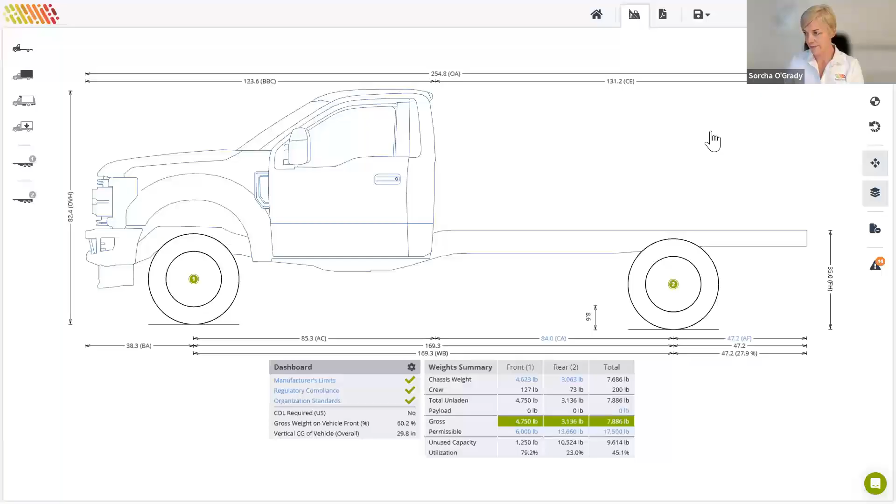Okay, so I've chosen this 84-inch CA vehicle to accommodate an 11-foot service body.

Just a quick tour of the interface before we carry on, so you know what you're looking at. There's a compliance dashboard here on the bottom left. We use that to verify compliance with manufacturer ratings, with regulation limits, and your own organization's internal standards, and we call those organization standards. You can also display your favorite measurements here, and I'll show you where to choose those later. Different users of the program have different interests or different things they want to highlight, and that's where you can do that.

There's a detailed weights table here with a detailed breakdown of weight distribution and color-coded compliance indicators. Right now they're all green, that's good. In this table, you will also be able to determine the maximum achievable payload when a body is added. So the payload is obviously 0 right now - there is no body for adding payload to.

The menus on the left-hand side, you'll use those to input information about the vehicle, body, equipment, and payload. On the right-hand side, you can switch views. For instance, you can switch from this summary view to a bridge view, center of gravity view, and back again.

Along the top, there are some - I call them completion actions. You can choose to print, save, or share your calculation. You can also choose to edit your settings up there. So that's kind of the interface in a nutshell.

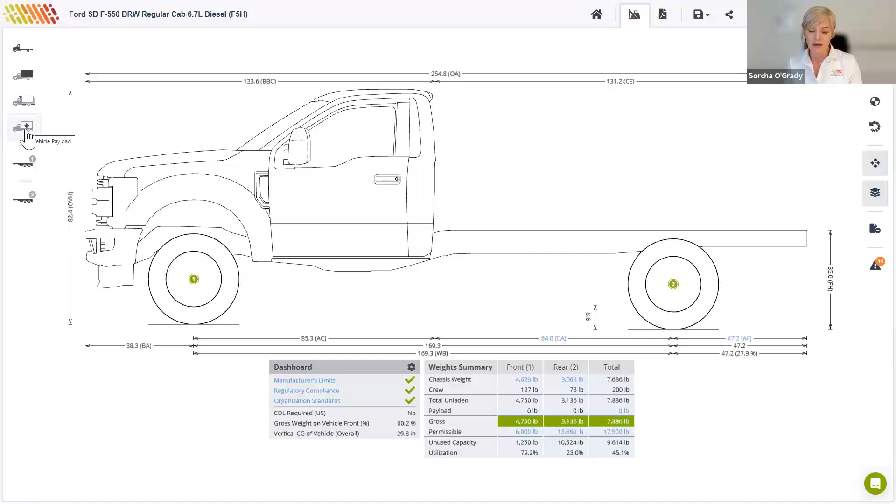So let's add a body from the second icon here on the left. I'm going to choose from the body categories - in this case, a service body. You can choose from preloaded standard bodies in our library, so you'll see a selection of bodies there. Again, you can filter these on keywords from the body descriptions.

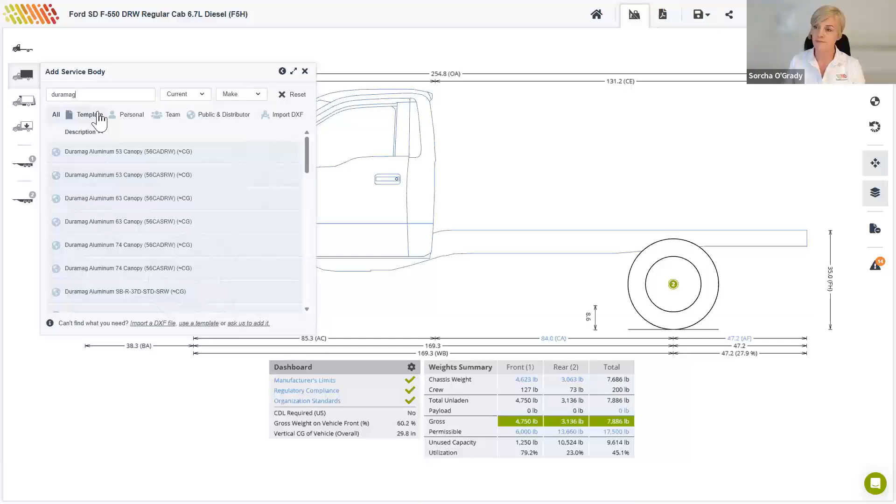In this case, I'm going to add a Duramag, and I'm going to look for one that fits an 84-inch CA. I'll choose that first one.

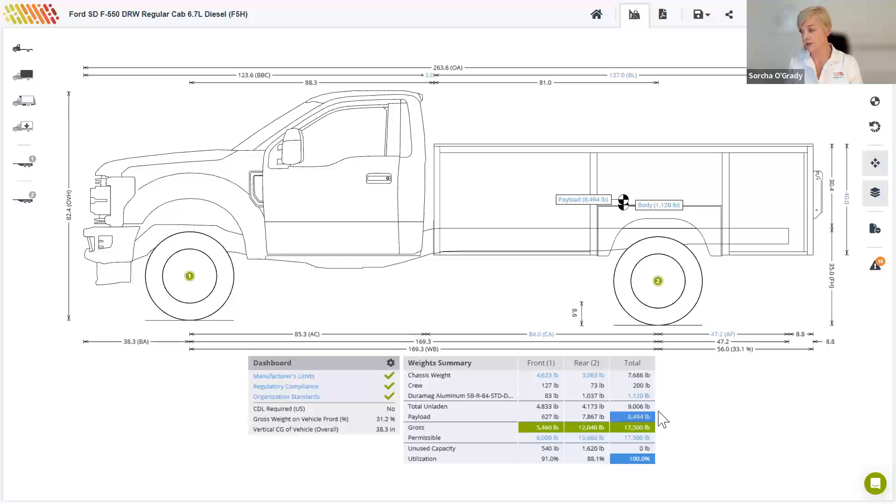So now that we've got a body on the vehicle, we can see in the weights table highlighted in blue our maximum achievable payload for this setup or this layout. And the maximum achievable payload is currently 8,494 pounds. So we click on the body again as a shortcut to open that body menu.

Since this is a standard drawing from Duramag, I can't edit the dimensions, but I can still override the weight and center of gravity values. It's worth noting that manufacturers who wish to add their products to our program can choose to make them available to all TruckScience users or only approved distributors.

We have recently added some new pages to our website here, which you can browse to see the bodies that are available in TruckScience. You'll see the Duramag that I just used here. You can browse that in your own time, but there is a new information page there on our website.

So an upfitter might choose to add a standard body, like we have done from the library, whereas a body manufacturer might like to use the tool to experiment with body design. We provide templates for this. So let's make a note of the dimensions and weight of this body, and then we can recreate it from a template body in just a moment.

You'll see the length of the body here is 137 inches, a height of 40, and the distance from the top of the chassis to the bottom of the body is 9.6 inches. We've got the width and depth of the compartments, and then a weight of 1,120 pounds.

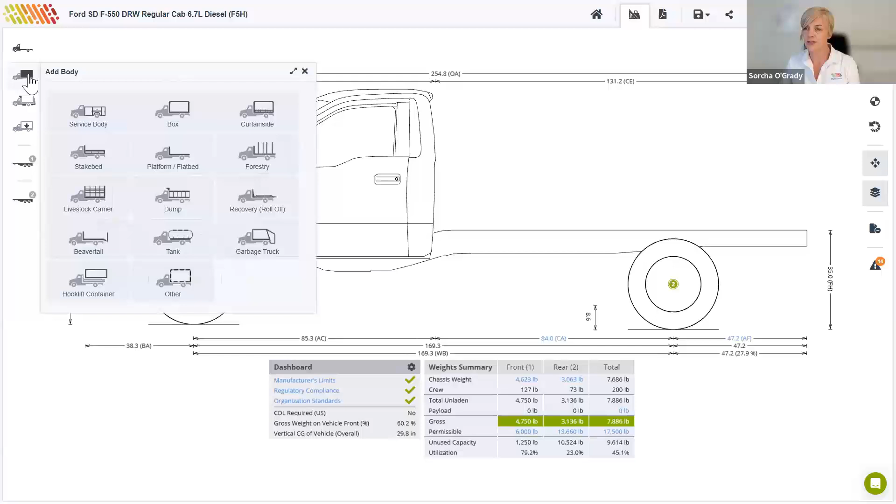So I'm just going to use the scissors to remove this standard body, and I'll add a body again from the left-hand side here. Again, I want to choose a service body, but this time I'm going to choose a template.

As you can see, templates have more generic drawings, but they do offer greater flexibility in terms of what I can edit. So if I click on the body again, they come with sensible default values for dimensions and weights, but I can edit them also.

So we'll just edit this one now to match the Duramag body we just had on. I'm going to update these dimensions as per what we just saw. This was 9.6, and we had a weight of 1,120. I think everything else is as is.

You can see that the payload is back to 8,494, which matches the payload we had when I had this standard Duramag drawing on there. You can experiment with body dimensions, weights, and center of gravity to see what it does for your payload, your overall center of gravity, etc. So that template allows you to do that. It's got ultimate flexibility in what you can change.

Now is a good time to point out the color-coded indicators beneath the drawing. The compliance scorecard on the bottom left here flags any possible non-compliance with the manufacturer ratings, your regulation or bridge weights, and your own organization's internal standards. Green ticks indicate that everything is good so far.

So let's open the settings dialog now to customize this dashboard. First, we'll choose the regulations that will be applied to our configurations. I'll pop into regulations applied here. I'm going to clear the current selection and then scroll or search for the relevant state or states.

So for instance, I can look for Californian state roads, Illinois, Texas. In fact, you can choose up to 5 at once. We'll just verify our calculations against those 3 for now.

We'll also look at our favorite measurements in here while I'm here. So I have added an indicator to indicate whether a CDL, commercial driver's license, is required for this setup, and we'll see that in a moment. I've also added that I want to see the percentage of the gross weight that's carried on the front of the vehicle. And lastly, I want to be able to see the overall height of the center of gravity. So there are obviously lots more that you can choose from here, but those are the 3 I've chosen for now.

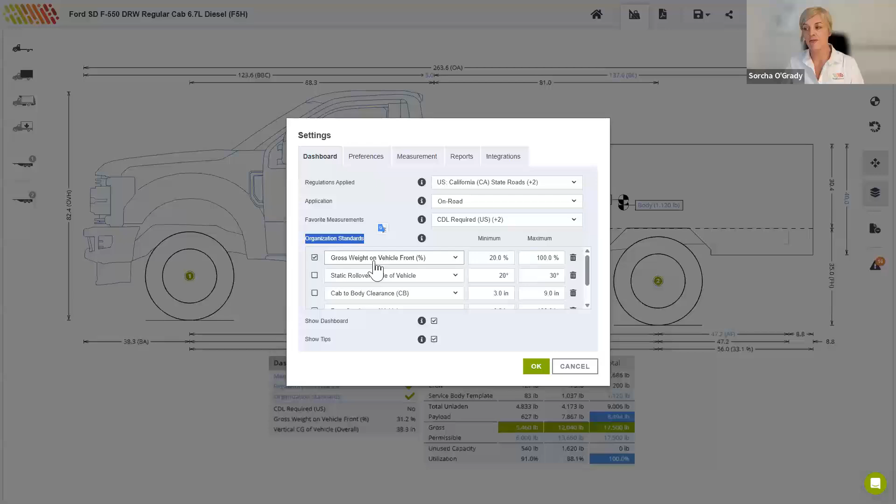I mentioned organization standards. These are the standards by which your organization wants to hold itself to account. So these are limits that are not covered by Ford in this case, and not covered by the DOT regulations in the states that we've chosen. These are checks that you put in place that your own organization would like to uphold. So for instance, I have just chosen one of these for now, and that is that the percentage of gross weight on the front of the vehicle should be at least 20%.

And this is to ensure that the vehicle can be steered and stopped safely. So from now on, my calculations will be checked against that there's at least 20% of the gross weight on the front of the vehicle. These can be toggled on and off here with these check boxes. I'll leave that one on for now.

So now if we pop into our regulatory compliance, you'll see the 3 states that I chose. If I look at organisation standards, you can see that there's a gross weight on the front of the vehicle being checked, and it's currently compliant. And we can see the manufacturer limits are also compliant for now.

Jens, are there any questions before I go ahead and keep going?

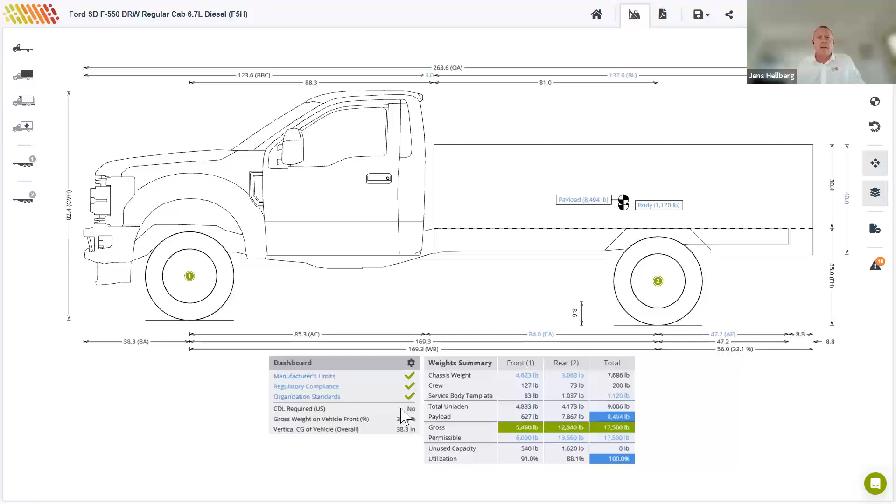So we've just had a look at the compliance dashboard. Now we'll move on to this weights summary table.

The weights table shows the breakdown of weights per component in the rows. So you'll see, for instance, that the service body is exerting a weight of 83 pounds on the front axle, 1,037 on the rear, and that is of its total weight of 1,120 pounds.

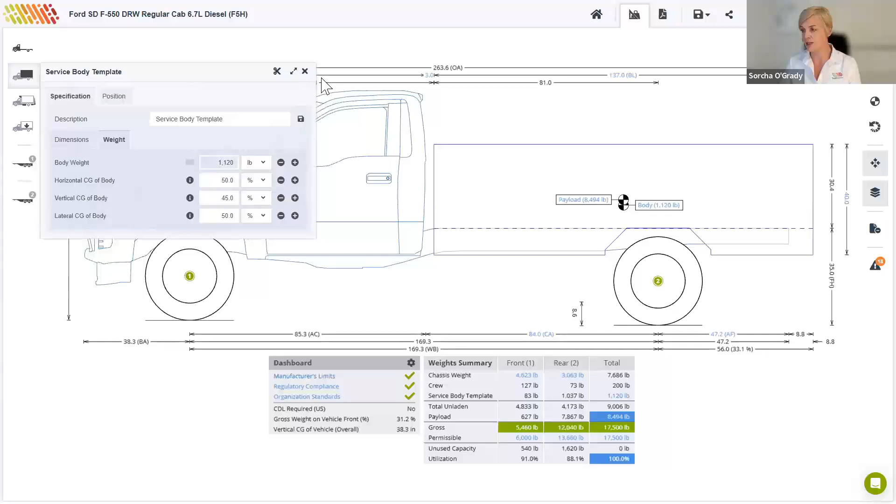It also shows the breakdown of weights across axles in the columns. So currently the gross weight on the front axle is 5,460. The gross on the rear is 12,040, and that's a total weight of 17,500 when the payload is 8,494. So by default, the payload is being maximized as we go.

And that payload figure is highlighted in blue. If we look down at the bottom two rows, we can see unused capacity and utilization, and these rows indicate any capacity that is being left on the table, so to speak. So when the total column, as it is now, is at 100% utilization, we know that we are realizing the total payload potential of this vehicle as is.

Obviously, right now we only have a service body on there, and we may wish to add more items, so we'll get to that in a moment. But just to understand what's going on while the setup is pretty simple.

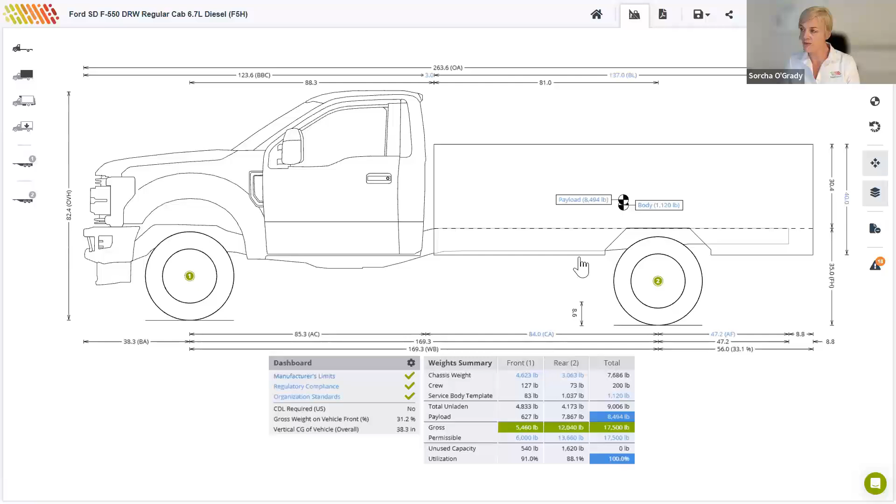The blue text in the weights table and on the drawing, the dimensions, indicates a clickable shortcut. So shortcuts open the menu on the left. For example, the body length here, and we can pop it in to see the rest of the dimensions around that, so that, for instance, we could change the body length by clicking on that body length and opening the dialog there.

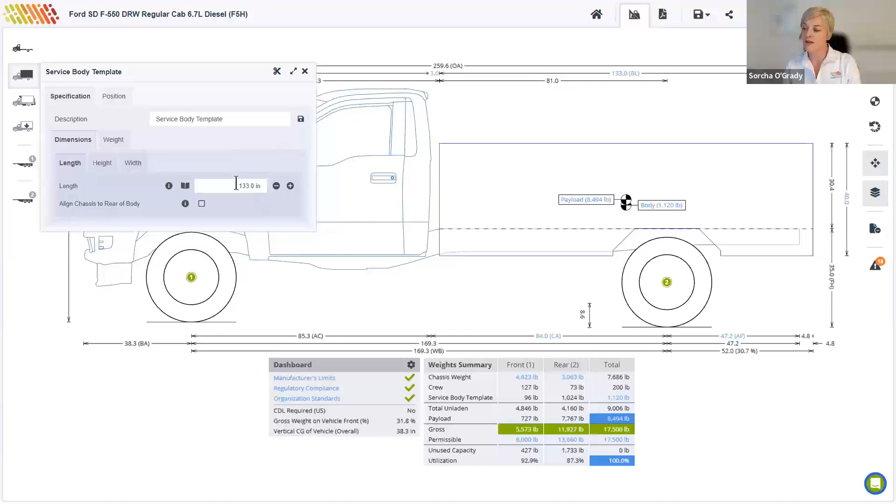As you make changes to the body dimensions, you'll notice that the graphic and the weights table are updating on the fly. So I had 137 inches here with 5,460 on the front. And if I change the body length to 133 inches, the gross weight on the front axle changes to 5,573.

If I look at the height, I can change that to, say, 28 inches. And we can also update the material weight.

So you can choose to express the body weight in absolute terms, 1,120 pounds, or you can switch that to pounds per running foot. And for instance, we can experiment with changing that from 101 pounds per foot to 91 pounds per foot, and you'll see our payload change from 8,494 to 8,605 in response to that change.

Obviously, reducing the weight of the body increases the maximum achievable payload, where neither of the axles are maxed out.

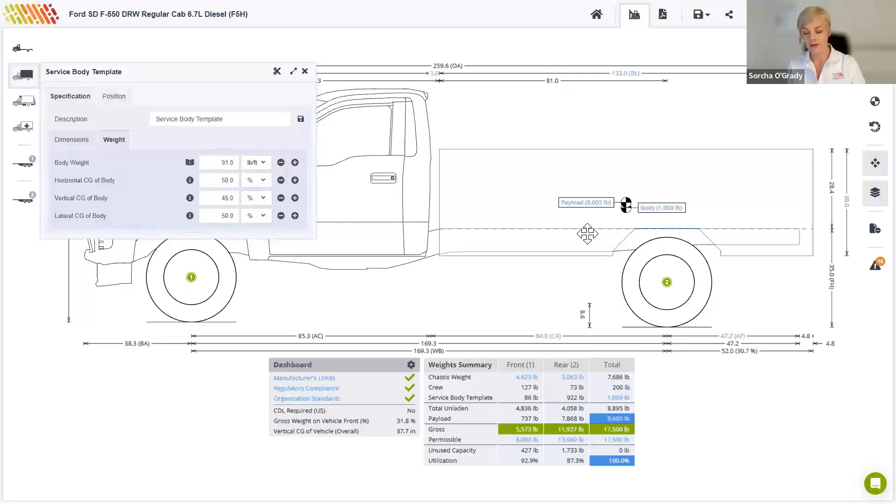So let's add some equipment using the third icon here on the left-hand side. We'll add a crane firstly, so we choose that category of crane, and you can choose from a number of standard cranes in the library.

So if we just scroll down here, you can see there are many brands already in the library, or you can just search by keyword. So for instance, we could add a Liftmoore crane, and we get an actual drawing to match. Or if we take that one off, we can add a similar crane from Auto Crane.

And you just drag it into position, you'll see the weights table is updated as we go.

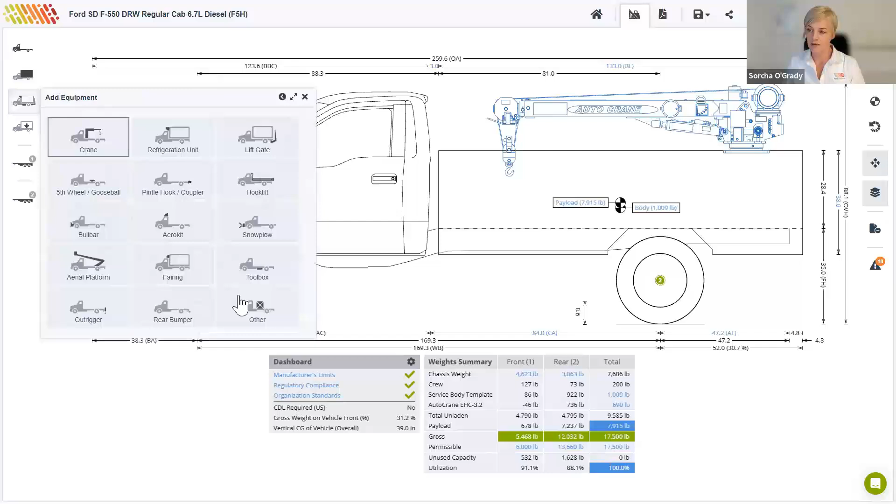So next you might want to add a generator or a compressor. Again, go back to the equipment menu, add, and this time we'll look in the other category.

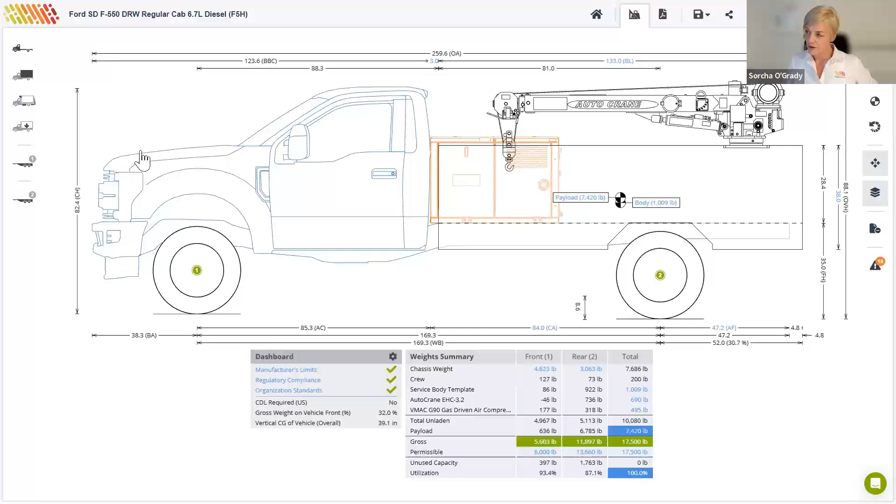And again, you can filter by make here, or you can simply just search by keyword, and we'll find a compressor. Again, we can position this compressor by dragging it as we did the crane, or we can open the menu to specify its position.

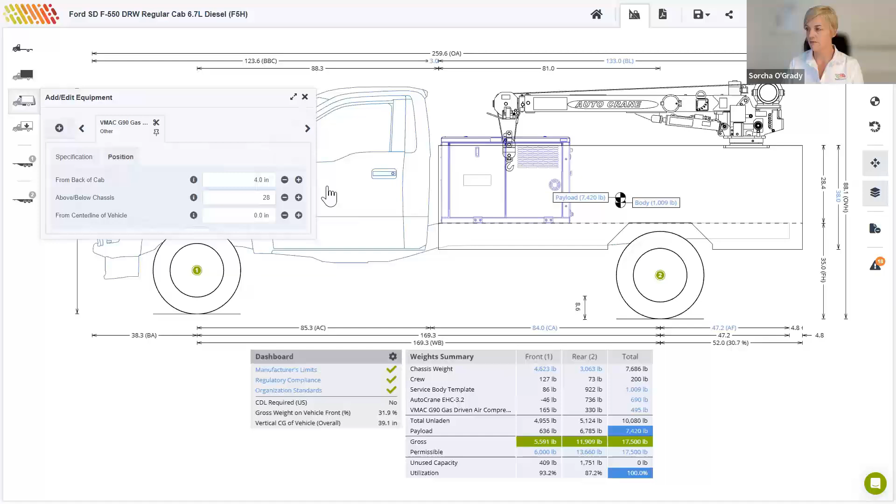So if we go to position here, we can move it to 4 inches from the back of the cab, or 28 inches above the chassis, around about there.

If you prefer to specify its position relative to the front axle instead of the back of the cab, you can change that in your settings, under preferences, specify equipment position relative to the frontmost axle.

And now if I go back to the position, I'll see that that first dimension is now relative to the front axle, 89.5 inches.

You can also override its default weight and center of gravity. Just select the checkbox here by 432, and we'll specify the horizontal center of gravity as being 45% from the front of the compressor.

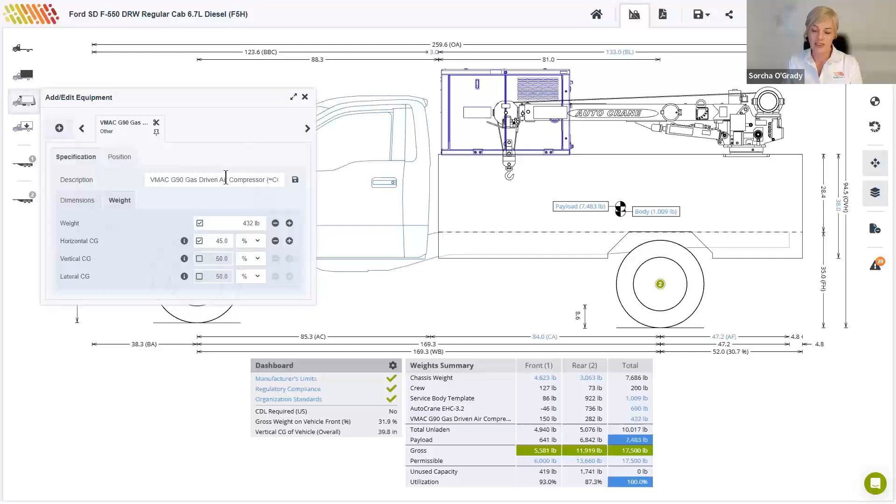To see detailed position and dimension attributes for this equipment on the drawing, you can toggle this pin to pin those dimensions to the drawing. I'll do that quickly to show you - you can see those extra dimensions pertaining to the compressor added to the drawing. Obviously you don't want this level of detail on everything at once, or the drawing will become very crowded, so that's why you're able to toggle it on and off.

At this stage, we could add a step and some outriggers among other items, but I'll skip those to save time. So just to point out again, this layout is utilizing 100% of the vehicle's capacity.

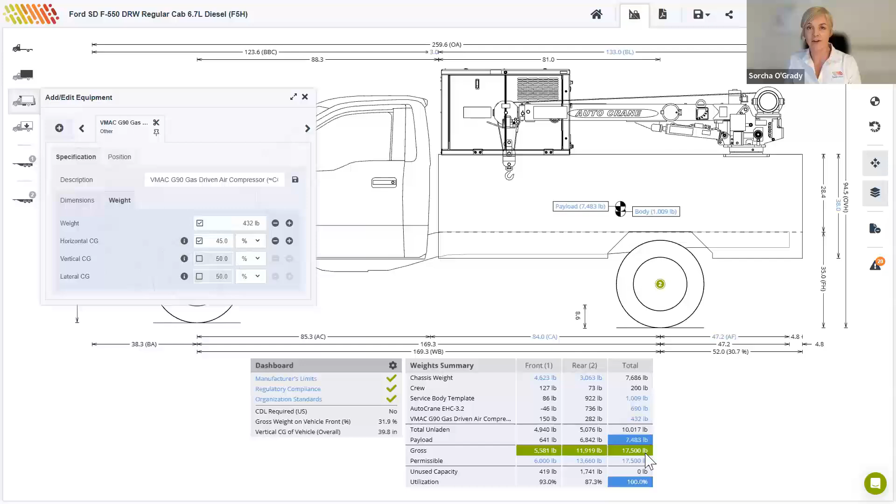The gross weight in green on the total column is 17,500 pounds, and the total weight is 17,500, representing 100%. If I click on this permissible value here, the total permissible of 17,500 is the lesser of the gross vehicle weight rating and the lowest of the state regulations we've chosen - California, Texas, and Illinois. The lesser of those limits is 40,000 in this case.

Jens, are there any questions before I proceed?

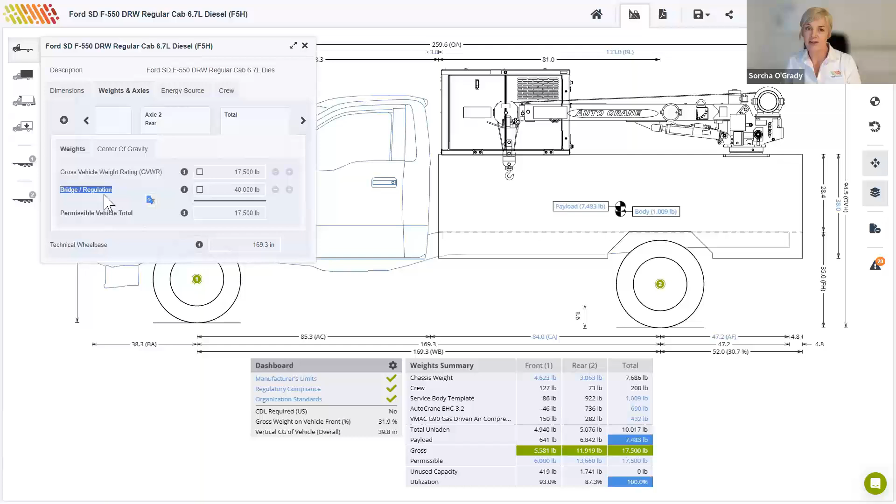Yeah, there have been a few questions which I've answered via the chat, but maybe one in particular might be interesting for you to also demonstrate. The question was whether there's an option of seeing driver or passenger side weights. On a service truck, obviously the crane would skew that weight to one side, so maybe you could just show the left-right distribution and the top view of this vehicle, just to demonstrate. But other than that, please keep the questions coming.

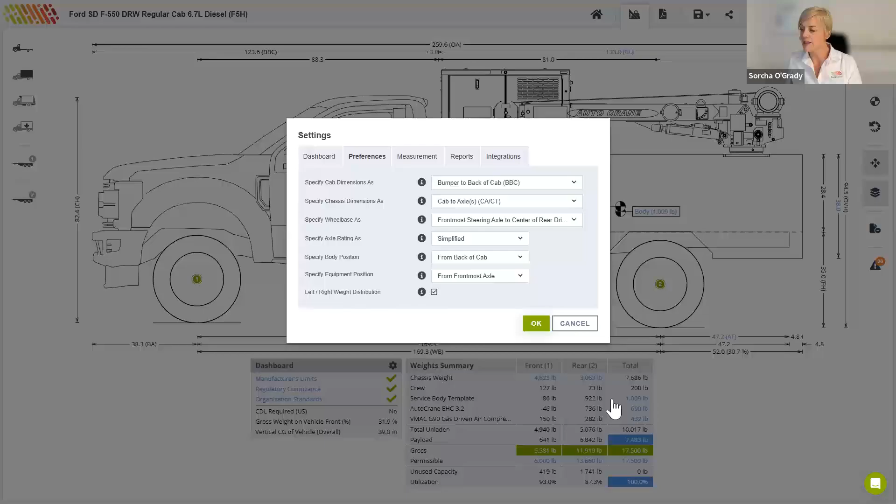Okay, so right away I'll show where you can add an additional row at the bottom of this table, which will calculate the left to right weight distribution. If I go to my preferences in settings, you'll see this left-right weight distribution option at the very bottom - if I add that, it will calculate the left-right distribution.

I will get to the top view in just a moment to reposition these items, and then it will become clear. We will also increase the weight of one of these, exaggerate the weight of one of the components to show you that left to right distribution. Will I carry on for now, Jens? Yes, please do.

Okay, so just before we get to the left to right distribution, we examined this axle utilization. I mentioned there's 100% utilization of the GVWR, as denoted by that blue highlighting in the second last row. You can also see the utilization of the front and rear axles - the front axle is at 93% and the rear is at 87.3%.

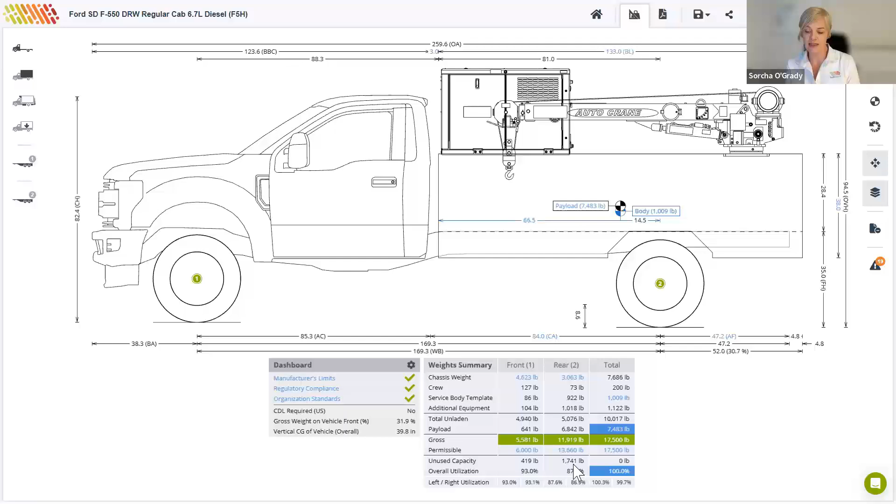If one of the axles had shown a utilization of 100% and the other had significant unused capacity, this would represent an opportunity to gain payload by moving some items towards the front or rear. But as it is, the crane and compressor are not that heavy, so I'm just going to exaggerate the weight of the compressor to illustrate this point.

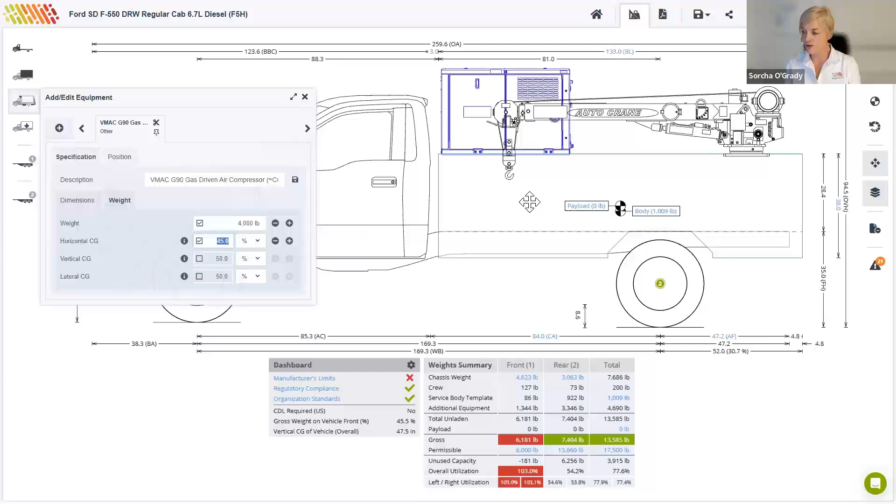So I click on the compressor here - we currently have a weight of 432, but I'm going to model a typo here and type 4,000 pounds in there. You'll see now that the front axle is overloaded, it's at 103% of capacity. The permissible is 6,000, which is the lesser of the gross axle weight rating and the regulatory limits - so we've got a permissible left and right of 3,000 and a permissible of 6,000 in total.

And you'll also notice that the payload has been zeroed because the front axle is already overweight.

So if we move to the top view here and take the compressor to the roadside and also towards the rear, we will see some things happening in the weights table. As I move the compressor towards the roadside, you'll see that we are now only overloaded on the front left corner of the vehicle - the front right corner is no longer overloaded, but the front left is. That's from moving it towards the roadside.

And then as I move it further back here, the front axle in its entirety is not overloaded, but the front left still is. If I continue to move it further back, maybe there's a sweet spot here. Yes.

So where I've positioned the compressor now, despite the weight being very much exaggerated at 4,000 pounds, we are no longer overloaded on any of the four corners. You'll see the rear axle is at 100% on the left right now. If we were to move the compressor into the middle here, we will take that weight off that left one, and now we haven't maxed out any of the four corners.

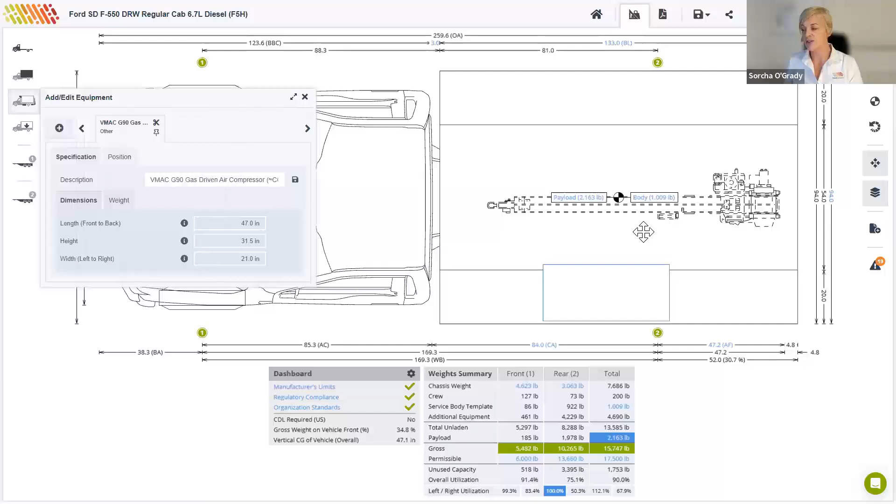I guess this is the power of performing weight analysis, is that you can calculate what is happening on each of your four corners and experiment with layout and placement of equipment to maximize payload and to take pressure off any particular axle or corner of your vehicle.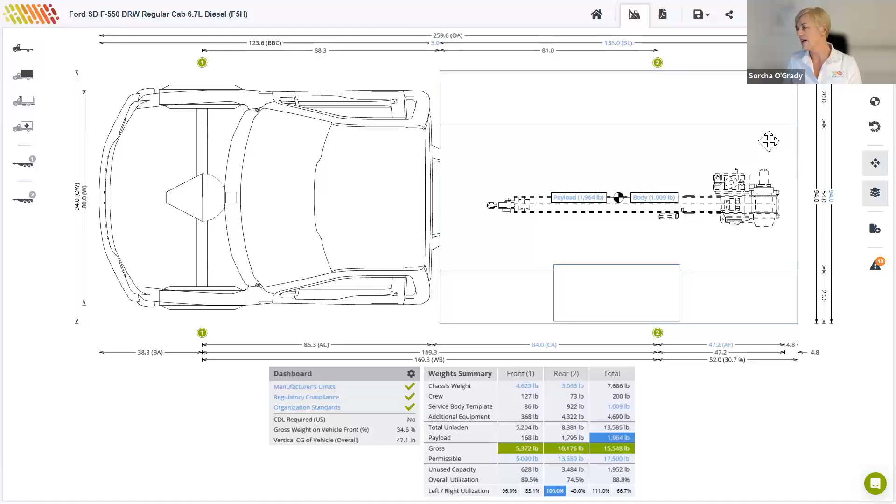Okay, we're obviously in the top view here. As I mentioned, the inputs come in on the left-hand side, and you can choose from top and side view on the right-hand side, this orientation. Obviously, the crane needs to move over to the roadside, that will help balance things out here as well. And we can, while we're here, edit the compartment depth as well.

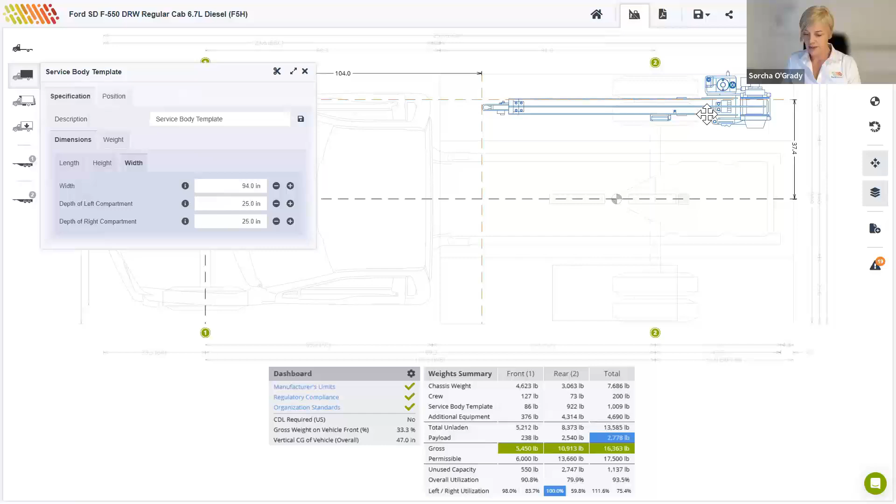So my crane is on the curbside, my compressor is on the roadside. Before we move on, maybe now would be a good time to unoverride the weight of that compressor. And I'll also switch back to my side view.

Any questions, Jens? Yes, the questions are coming thick and fast, which is great.

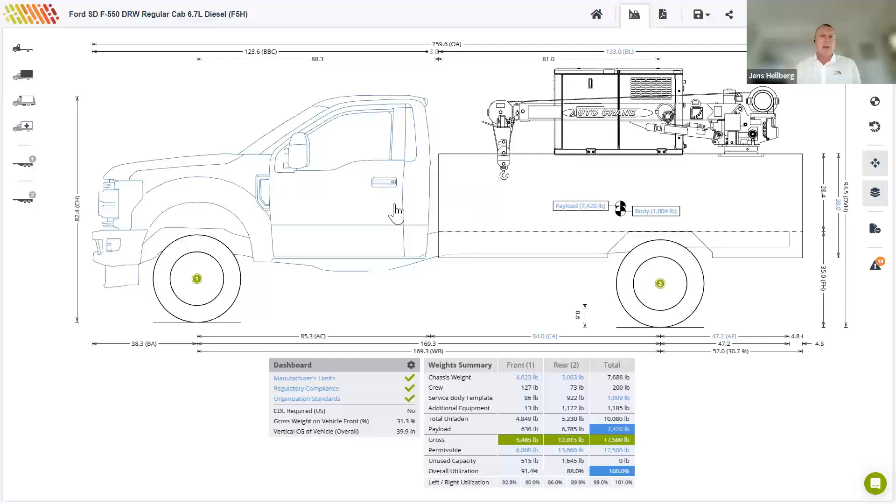One question here that maybe you could quickly demonstrate is about the fuel tanks - how much fuel is in the tank, and maybe also show how you can change the contents of the tank. So the question was, does the data assume the weight factor of a full tank of fuel based on the fuel tank size or having dual tanks? Yeah, in this case there's obviously a fuel tank and a DEF tank, and you can specify the contents of both. I hope that answers that question.

I can also obviously, sorry Jens. There's another question there about whether we can use the software to build trailers, and the answer to that question is yes. We may or may not be demonstrating that - you'll get to that, yeah. Okay, excellent.

So I was just pointing out that you can change the capacity of these fuel tanks also. In this case, if I increase the capacity of the tank to 60 gallons, now there are 40 gallons still included in the chassis weight, and there is an extra 20 gallons which can be included in the fuel and crew, which you'll see as the second line in the weight summary. So it does go into that level of detail.

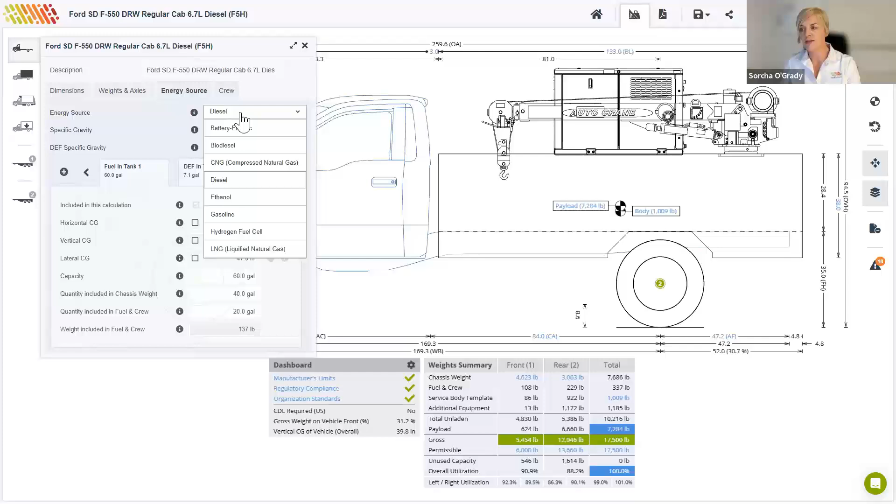You can also change the energy source of a vehicle. In some cases, for example, if we switch to battery electric, we should see the battery powered vehicles qualify for a 2,000 pound weight increase on the overall bridge, and that is in California and Texas. So the regulations engine is aware of those exemptions or extra weight allowances depending on the fuel source. I'm just going to switch that back - that was diesel, wasn't it?

Okay, and I will get to the trailer in a little while.

Okay, so now we have a proposal to agree with our customer. The vehicle GVWR is 17,500 pounds, and the payload capacity is 7,420 right now, and that is based on this chassis with this body, this crane, and this compressor.

Similarly to the body, the way I used a template body, if you don't have the drawings for the crane or the compressor, you can use template equipment items and just build up your own. I will also show you in just a moment how to import a drawing from a DXF file that you have yourself. As a body manufacturer, we might wish to send this layout to a draftsman to get a more realistic body drawing for our customer sign-off document, which I'll get to later.

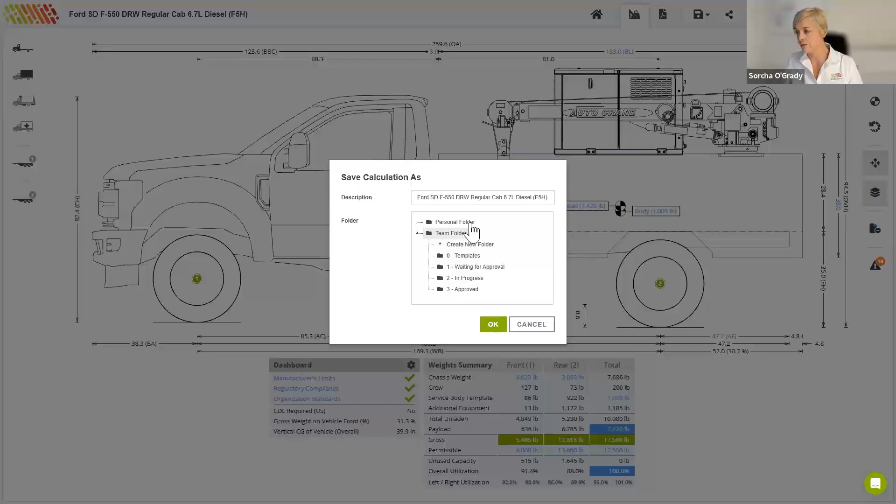So in this case, we would just save this calculation. I'm going to save as, and I'll save it in my personal folder. Saving it in my personal folder makes it available to just myself in future. If I were to save it in my team folder, you can organize your team folder however you like, but your colleagues that are also using the tool can then collaborate on your layouts with you. I'll just save this one in my team folder for now, and I'm going to share it.

So I've got another little icon here to share. For instance, I'm going to share with the fictitious draftsman at my company and make some comments and invite them to provide me with the drawing for the body.

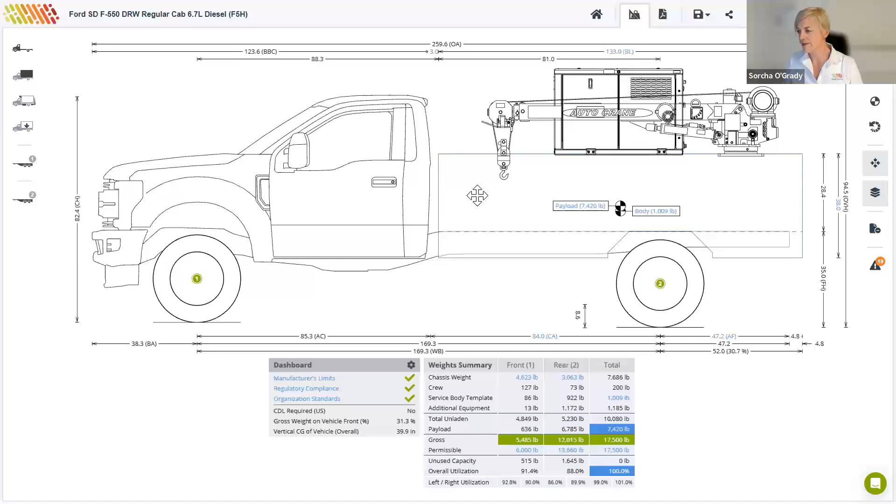So when that drawing comes back after some time has elapsed and we receive a drawing from our draftsman, we can replace this template body with an actual body drawing. I'm just going to take this body off, click on the body, and cut it off, then choose body, add a service body again.

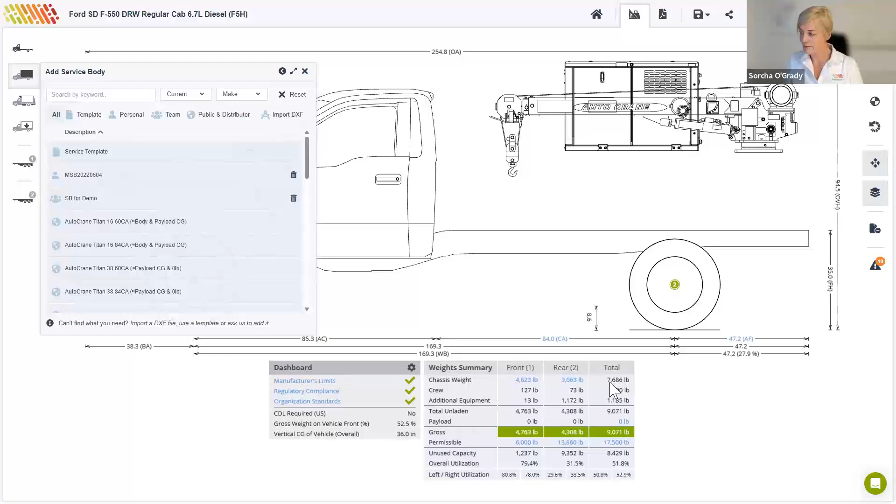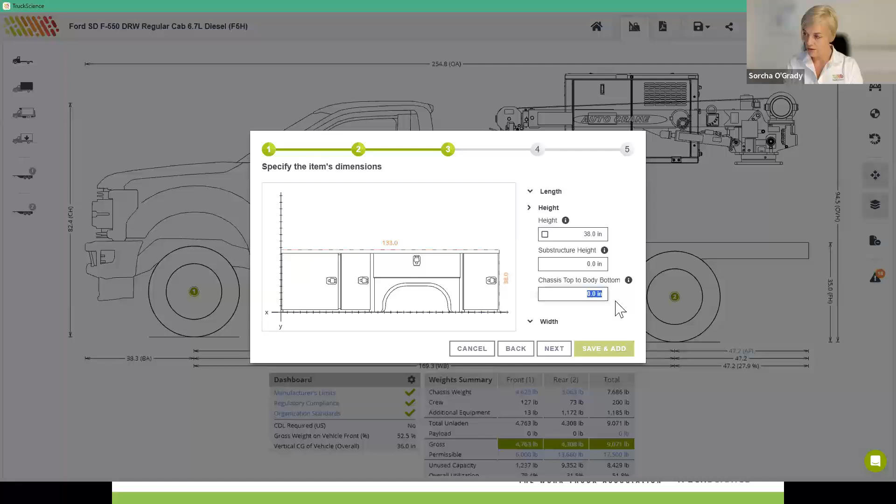And I'll import a DXF, choosing a file from my desktop. I'll give it that length of 133 that we had, and give it that dimension from the top of the chassis to the bottom of the body again. Then I'll pop into the width here and override the width to 94.

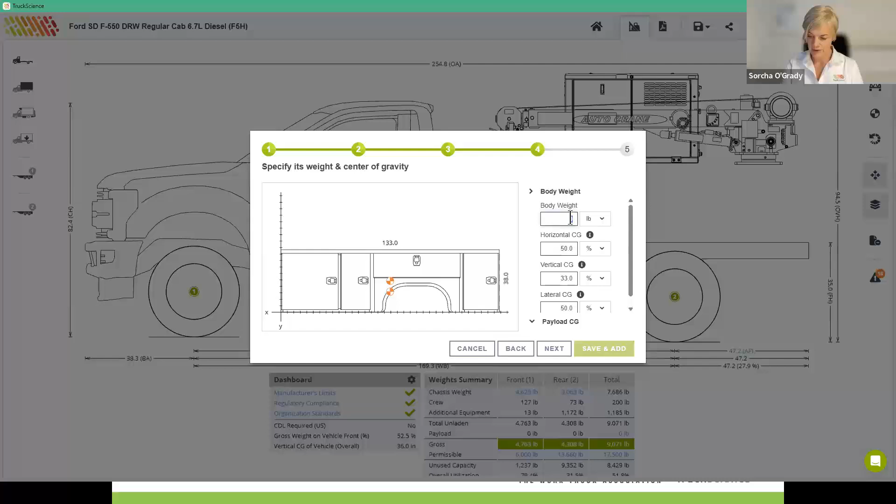And we had those compartments at 25 inches each. For the body weight, I'm going to give it a weight of 997 - it should really match whatever you used earlier. And then we'll just save it as my service body.

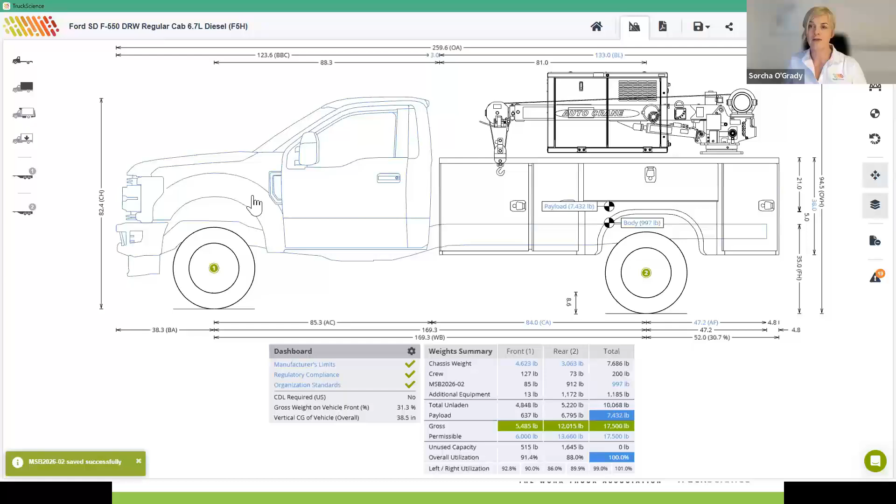So that is just the process of adding a body from a DXF drawing. If I click on this body, I can also choose to save this body in my team library to make it available to my colleagues who are also using the program, so we don't all have to repeat the work of importing that DXF drawing.

I can additionally choose to share it with my approved distributors, and I can allow them to see a read-only copy or an editable copy. And lastly, the most public option is to share it to the public library, and then it will be reusable by all users of the TruckScience tool. Obviously some manufacturers, as you'd have seen in the library, see that as a way to promote their products to upfitters or distributors using TruckScience.

Let's cancel out of that, and I'm just going to reposition these items to meet my body.

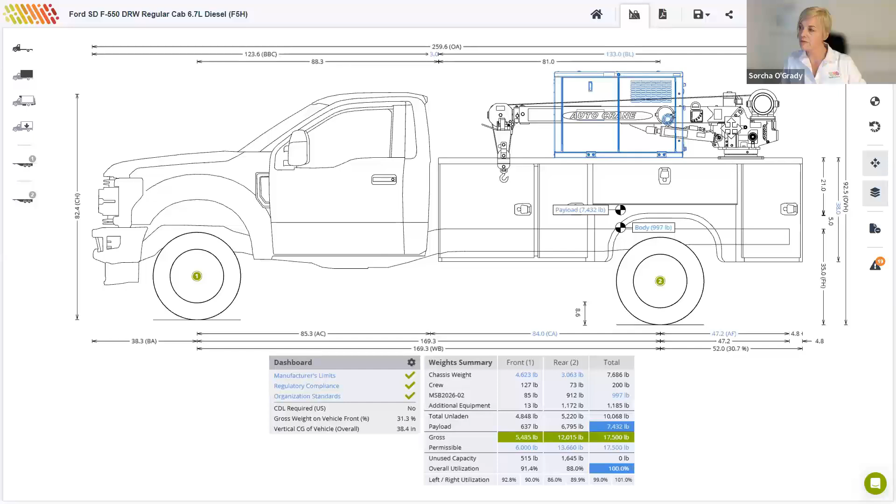Any questions before we move on, Jens? Not just at the minute - I think I've answered most of them. I'll get back to you if that changes.

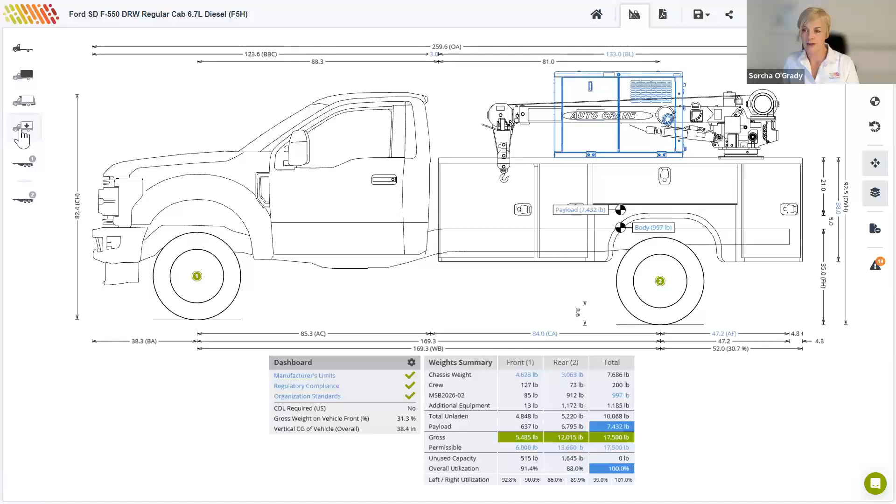Okay, thanks. So up to now we've been using what we call the default maximized or simple payload. It's an evenly distributed load with the optimum maximum payload for this particular configuration at 7,432 pounds. If I click on the payload icon on the left-hand side, I can choose to add some user-defined point loads by switching from simple payload to detailed payload.

I'm just going to add a generic payload template item, which right now is just a rectangular piece of equipment. Again, you can import drawings for your payload items if you want to make them more true to life. But if I hover to highlight this and click to edit it, it opens my menu on the left-hand side, so I can give it a more recognizable name that will appear in my weights table - in this case, tools.

And then I just want to specify dimensions and weight for this tool. So I'm just going to change the dimensions, simply giving a length, height, and width. Specify its weight - in this case, 750 pounds. And I'm going to position it a little bit in from the edges, so I'll give it 2 inches from the headboard, from the floor, and from the sidewall.

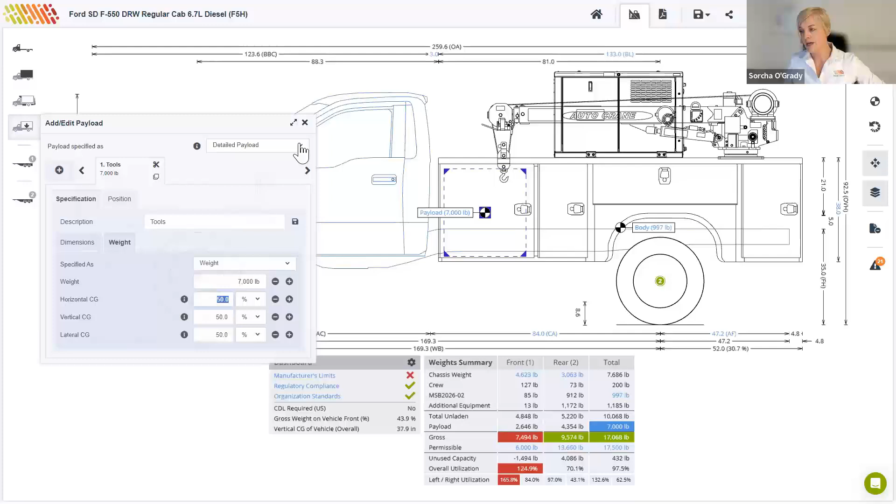And now we have some tools on there. Let's see what happens if I accidentally make that weight 7,000. As expected, the front axle is now overloaded, highlighted in red. We can see that it's the manufacturer limit that has been exceeded here, not the regulations for Texas, California, and Illinois - that's just highlighted in our compliance dashboard.

Manufacturer limits have been exceeded. We can see that we have a gross weight on the front of 7,494, even though the maximum permissible on the front axle is 6,000. So we're overloaded on the front, and we're also overloaded on the left front corner.

If I pop back to the top view and move these tools to the right, we will become overloaded on the right corner instead. And as I move around, you can see that we're overloading one corner or another.

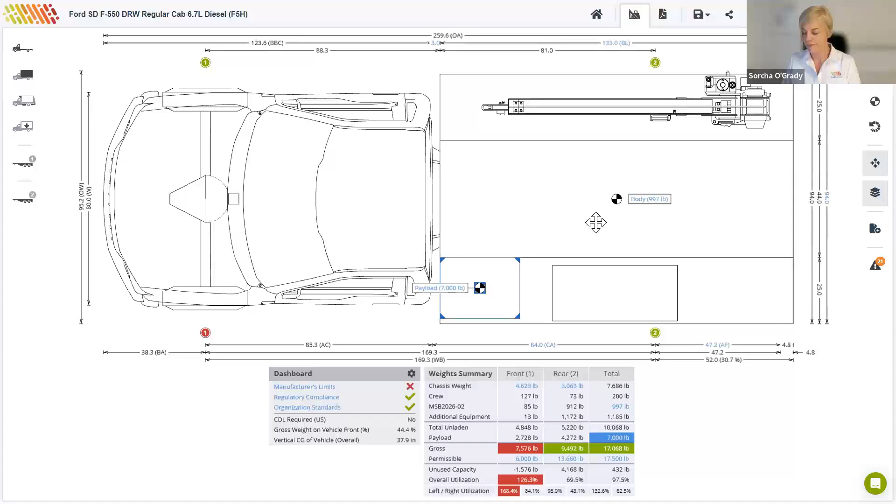So just to show you where those limits are coming from, if I click on the permissible value here in the table, 6,000 pounds, we've got a gross axle weight rating of 6,000 and a bridge or regulation limit of 20,000. So the lesser of the two is the 6,000 permissible on the front axle.

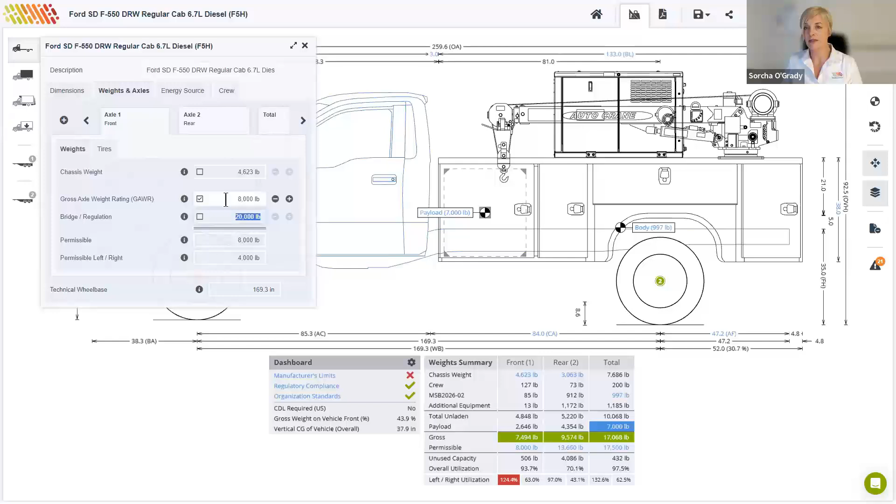Of course, upgrading an axle can sometimes make this problem go away. So I can override that gross axle weight rating to 8,000. And now we're no longer exceeding the 8,000 front limit, but we still have the issue with our left to right distribution. And if I go to my top view and move those tools into the center, that problem is now also solved.

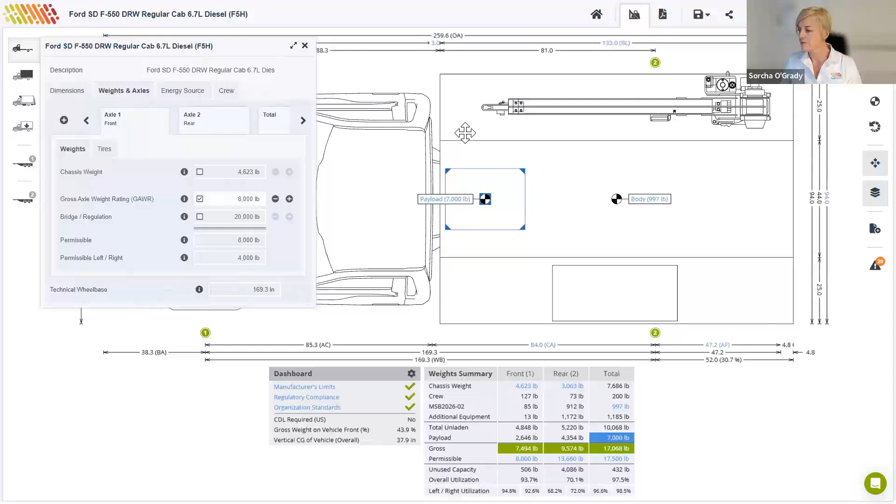Of course, I can also just override the weight of the tools back down to the original, which was 750 pounds.

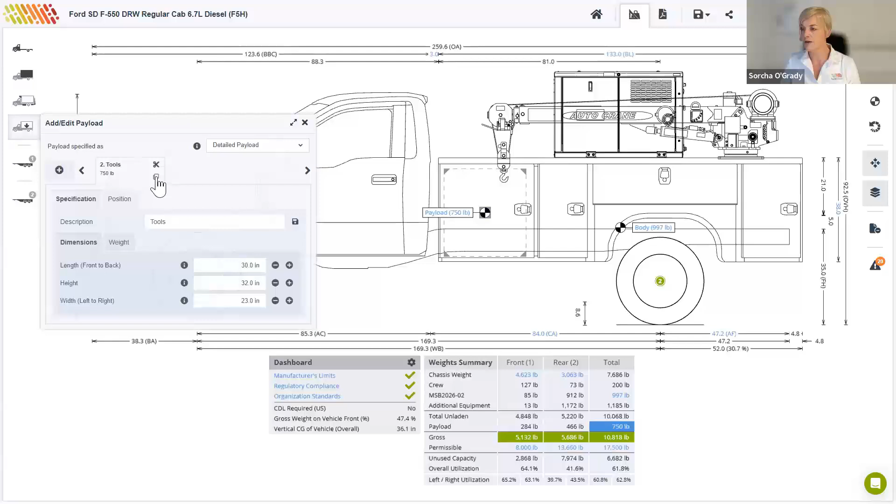So you'll just remember that those blue values are shortcuts. So again, I can click on that payload link on the drawing to change the weight of that payload item back to 750. I can of course copy a few more of those payload items on there, and they will be just placed along the load deck. Just cut them back off again.

Okay, so Jens, are there any more questions before I add the trailer?

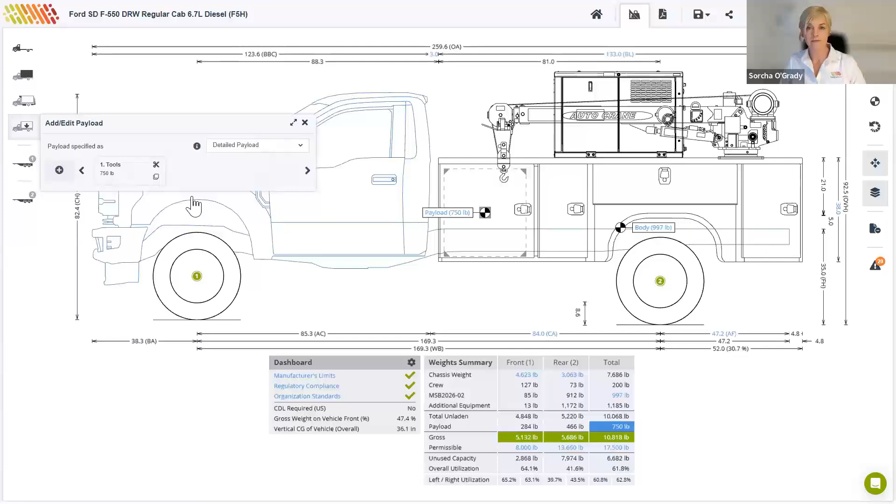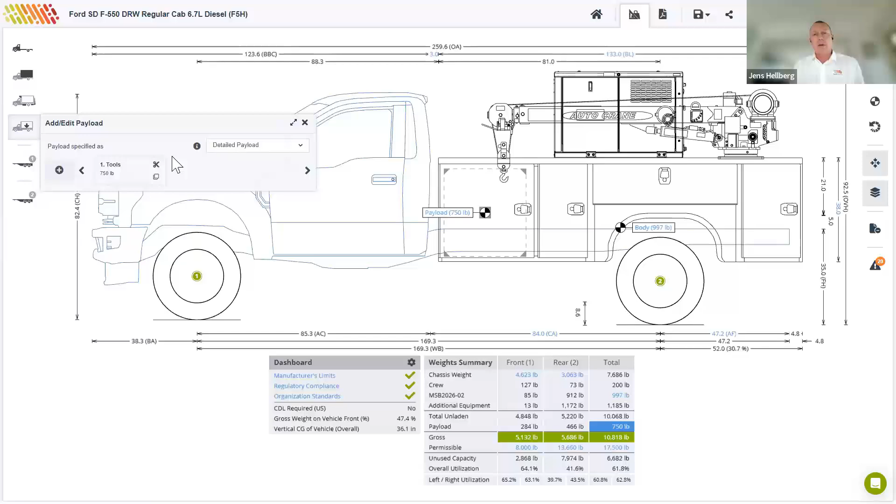I suppose there's a question around whether there are any training videos or articles where one can learn, kind of do some self-learning on the application. Maybe you could point that out. There's also a question on who the target audience is of this product. Maybe you could live answer those two. Okay. There have also been some questions around pricing, but maybe, which I've partially answered, but maybe you can also just point people to where they can find more information on that. Okay.

Firstly, we're asking about training materials or videos. So if you go to truckscience.com, our website, underneath resources, there are both explainer videos and recorded webinars. We normally run a webinar every couple of months or so, and all of the webinar recordings are available underneath the webinars link there. These explainer videos are much shorter. They tend to be 2, 3, 4 minutes long, and they deal with one topic at a time - understanding the weights table, calculating center of gravity, how to import a drawing, how to add axles, edit axle ratings, etc. If there's anything you would like another explainer video on, please let us know and we can add them there. But those are very short snippets of training material. So that was the videos.

Somebody asked about the target audience. As I say, a picture paints 1,000 words. The tool is generally used by chassis dealers, body manufacturers, upfitters, fleet engineers, and fleet acquisition specialists in cities, fleet managers. It's also used by accident reconstruction, and I guess we're just coming across new uses all of the time. I think there are over 300 NTEA members using the tool now, so there's a lot of synergy there with the NTEA members, and for that reason, we really value our partnership with NTEA.

All right, so let's add a trailer. First, we'll obviously need to add a hitch. Again, I just find that under the equipment categories. And I'll just find one that I am familiar with here. So we're just going to find that conventional hitch, and then I will grab a trailer from the trailer menus on the left-hand side. So you'll see, as I said, all of the inputs really go in on the left. We've got chassis, vehicle chassis, body, equipment, payload, and then this first one is trailer one.

So I'm going to choose a center axle drawbar trailer. And I'm just going to choose the center axle drawbar plus beaver tail that I've already added to my team library.

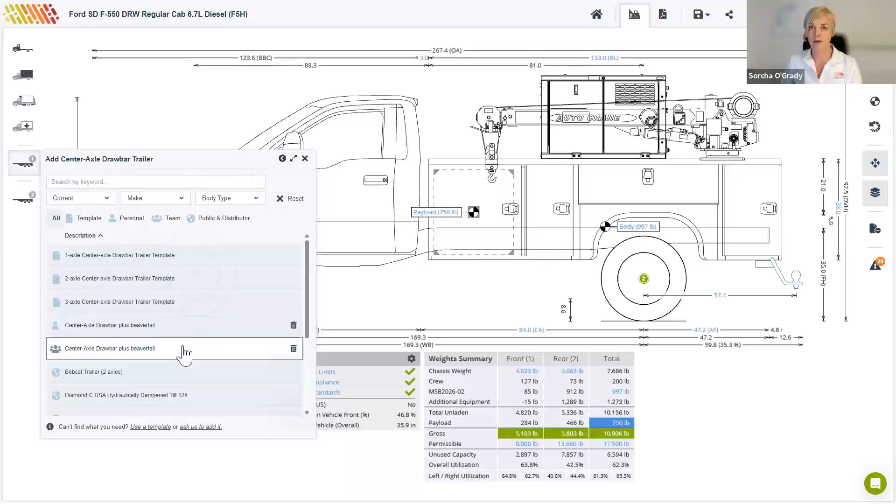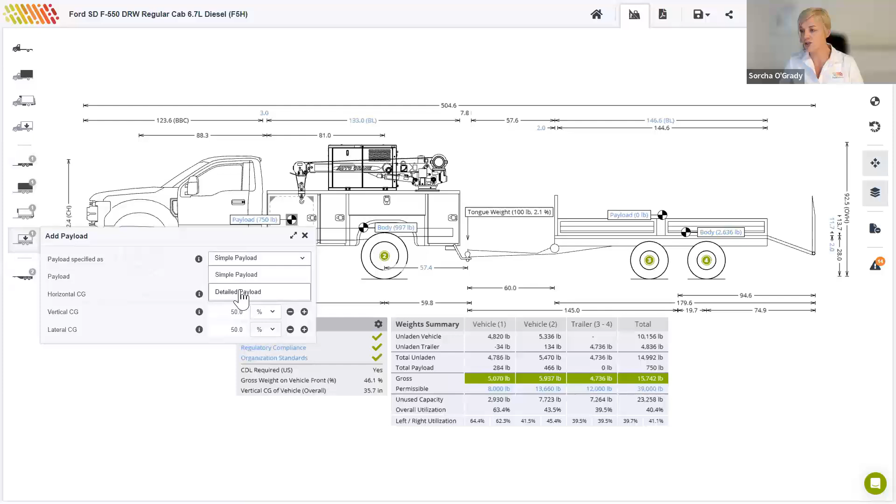And there we go. I'm going to put some payload on there also. So when you've added the trailer, you get the same kind of menus you already had above. You've got trailer body, trailer equipment, and trailer payload. I'm going to switch that payload to detailed again because I don't want just the evenly distributed load. I want to add a bobcat.

And now that I've added payload, you'll see that the tongue weight or hitch load is expressed as a percentage of the total trailer weight. So in this case, 6.6% of the total trailer weight is being transferred onto the hitch. And by total trailer weight, I mean the trailer and its payload.

So if I drag the bobcat forward or backwards, I will increase or decrease that tongue weight. I'm just going to drag it back a little bit. You can see the weights table is recalculating as we go. And now we've just got 1.7% of the total trailer weight being transferred.

You can switch to the top view again to center the payload laterally, and back again to the side view. You can obviously explore these views in detail in your own time, but I can give you a quick rundown through them now.

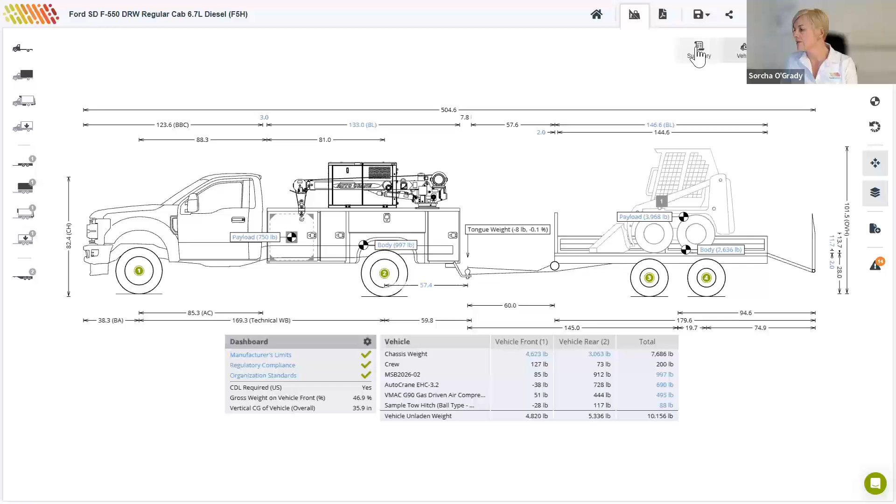So we've got that overview at the top, summary, and then the overview of the vehicle will give you a detailed breakdown of the vehicle's unladen weight. You'll notice that some of the components are exerting negative weight on the front axle. In this case, the crane and the hitch are exerting negative weight on the front axle because their weight is mostly distributed towards the rear. But if I go back to my summary, I can see that the front axle of the vehicle is carrying 47% of the gross weight, so that's not a problem.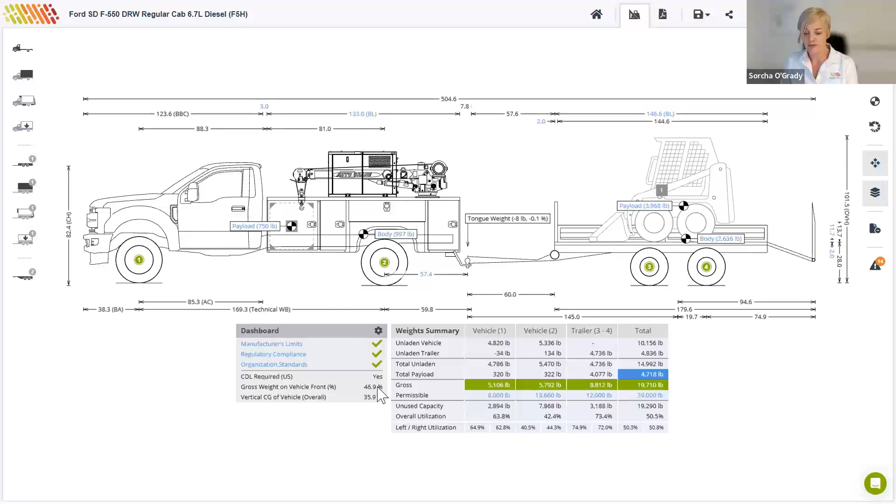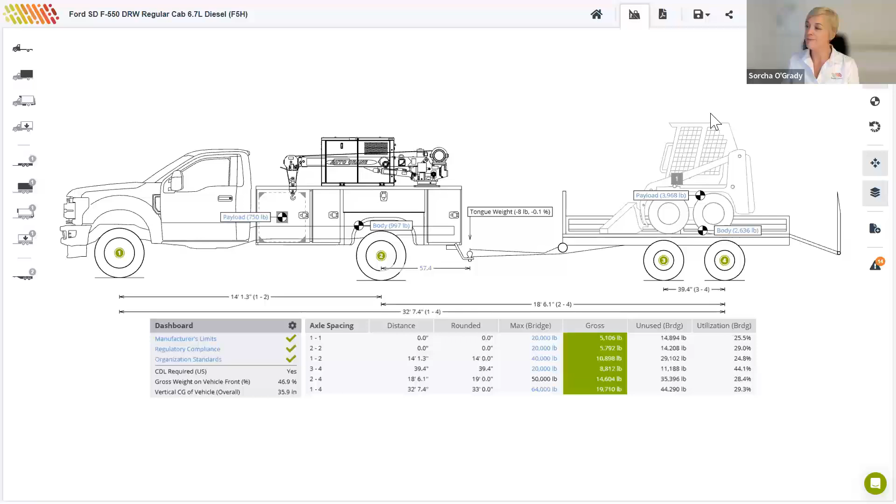There's also a bridge view, and the bridge view compares the actual weight on each axle group with the permissible weights as per the bridge law. So those of you who have a good understanding of the bridge law would be able to see what's going on there. There's a center of gravity view, and the summary.

In the summary, you can review center of gravity points, including the overall vertical center of gravity of both the vehicle and the trailer. So the vehicle's overall center of gravity, if you look towards the front here, is about 36 inches from the ground.

You can pin any particular item's center of gravity to the drawing. By default, they're not all shown because the drawing will get quite busy if you pin them all on there, but of course you can, if that is something you want to be able to see, all of the center of gravity points, just toggle them on and off like that.

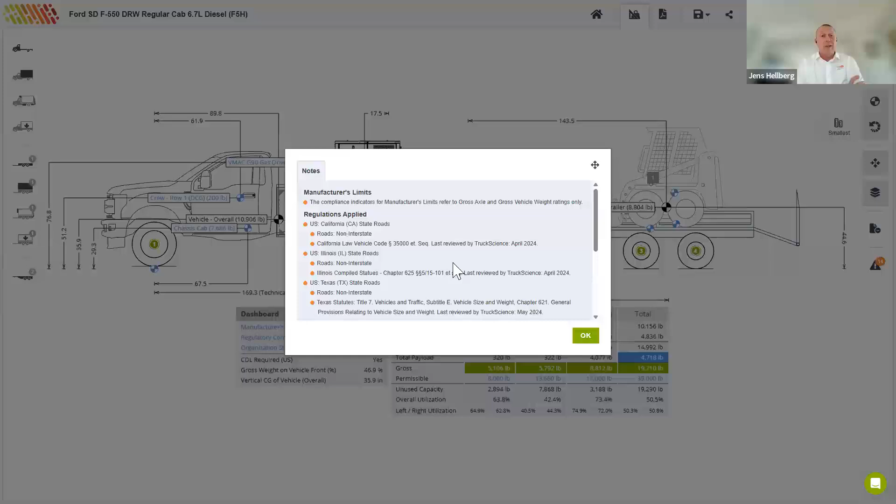My answer there was that I'm not sure whether there are any regulatory guidelines there, but maybe you could show the organization standard where you can specify a range for the tongue weight as a percentage of the trailer.

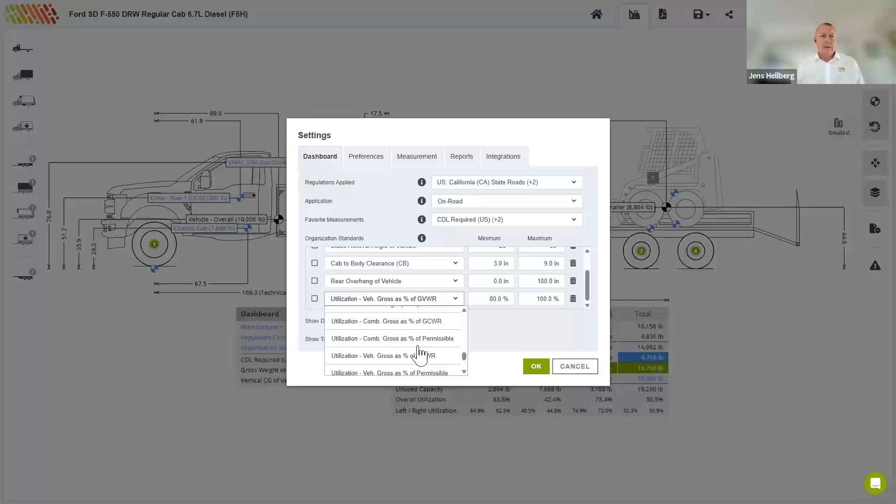So I'll just choose it here, tongue weight as a percentage of trailer weight. I'll toggle that organization standard on, and then I can set a tolerance. So for instance, if it needs to be between 10 and 40%, this comes with a warning that I'm not sure what these should be, so I'm just going to guess. And now you'll see that my organization standard is broken there.

The tongue weight is not complying with the range that I specified. In that case, you may also want to include tongue weight as a favorite measurement. I'll turn them both on there. Now you can see that the actual tongue weight is minus 8 pounds, or minus 0.1%.

So if I move the bobcat forward, I just want to exceed 10% here to get my... Okay, so I'm not sure if you're happy with the bobcat in that position, but it has fixed the problem where the tongue weight was not within my own organization standards.

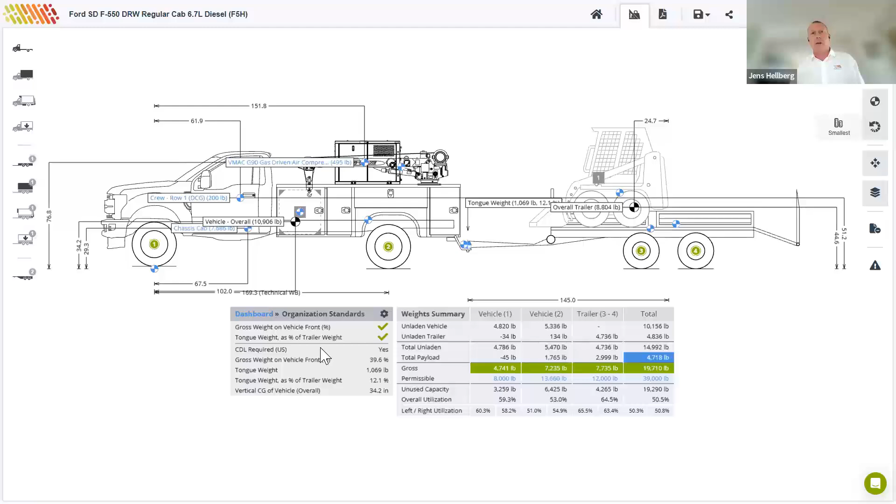There's another question there: are we able to import existing Load Expert files? The answer to that question is unfortunately not. But it is possible to recreate that calculation within our platform from a printout from Load Expert, and our support team would be more than happy to help you with that.

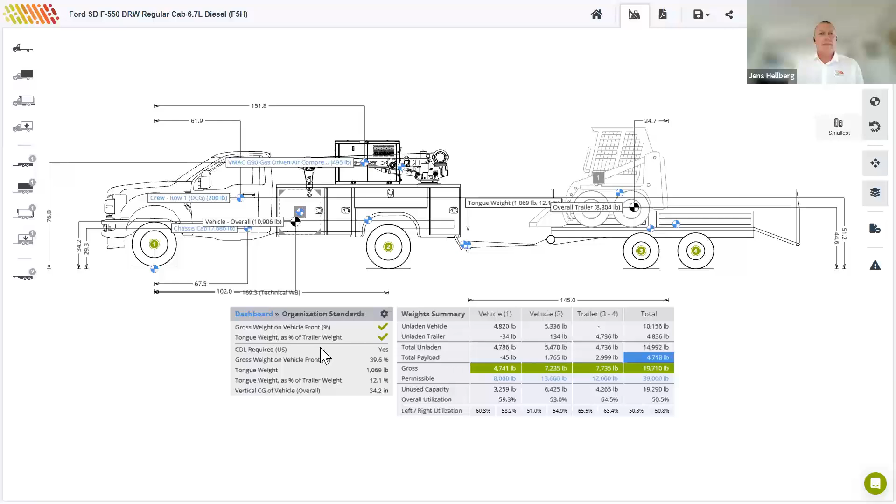Is that it? Yes, okay.

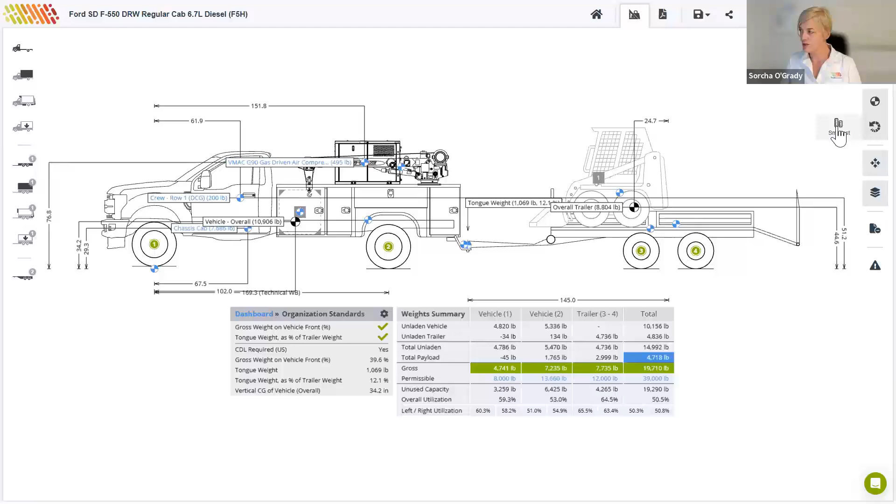So I was just going to show you the turning radius, and that's another alternative view here, the fourth one down on the right-hand side, and this represents the smallest circle in which the truck can turn. And then we already looked at the side and top view, etc.

So I'll just pop down here to notes and warnings, and you can review some notes about the regulations that have been applied here, and in general we can also see the vehicle's static rollover angle and the static rollover threshold, assuming a stiff suspension and no tire flex. I won't read through all of those notes, but you will see warnings in there as well if there's anything to be concerned about.

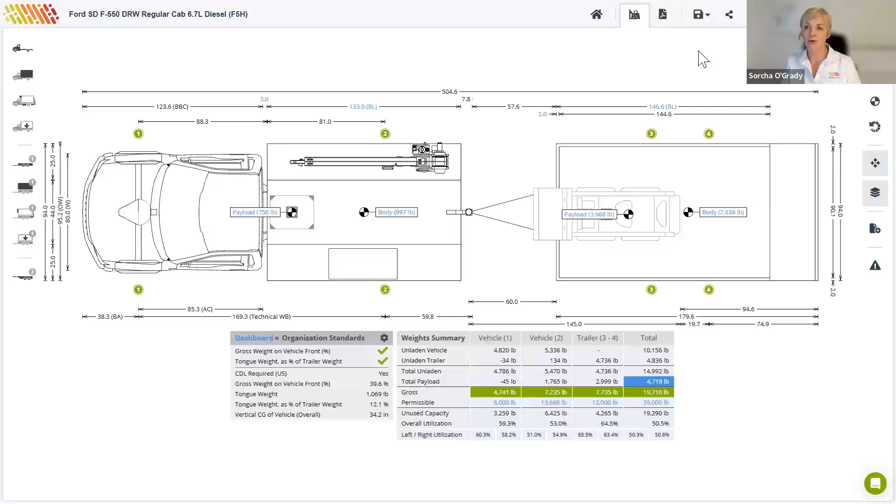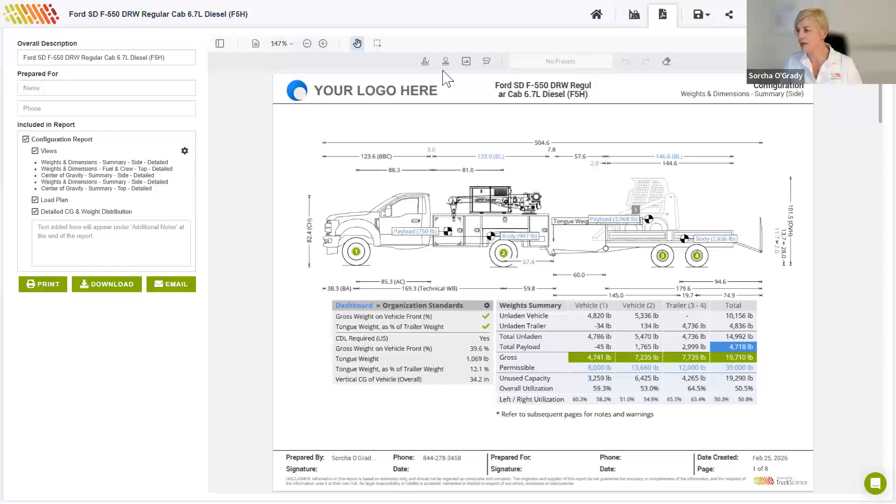Then lastly, to export the current view to a PDF document customized with your logo, you can click this PDF icon. In fact, it's not just the current view, you can choose as many views as you want to include in your settings. So you'll obviously have uploaded your own logo here, and you can add, for instance, a customer logo.

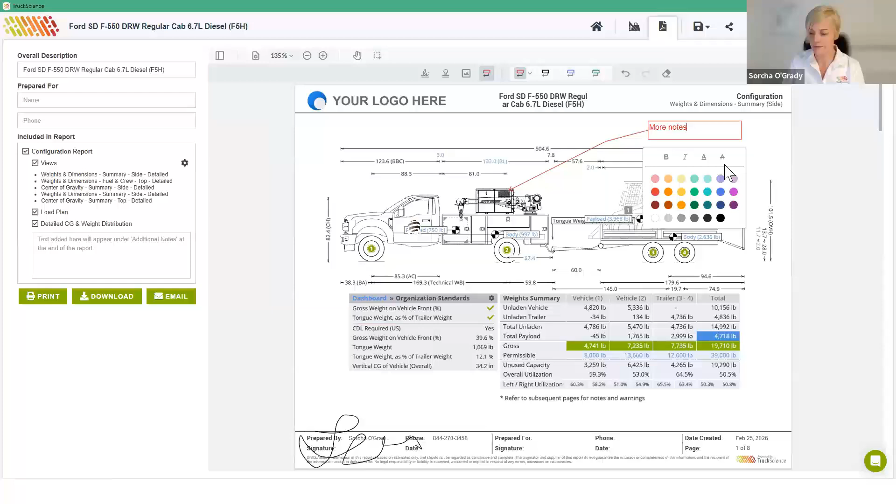To this PDF, something like that, you can add a signature. You can add some additional information also by adding a call out like this. More notes. Okay, so that is the PDF, and again, you can include as many or as few views as you like.

The right information in the wrong hands, I guess, is not the right information. So you may not want to include all of the views for all of your audiences, but you can do so if you like. And then, of course, you can print, download, or email that PDF as you please.

Lastly, there's a live chat here in the bottom right-hand corner. If you do need help while using the tool, you are welcome to pop open that chat. We can organize to share screens and assist you with anything you might be struggling with.

So I will just save my calculation now that I'm done, and I'm just going to head back out to my presentation, but I'm pretty much done there too. I know we are tight for time.

Oh yes, I'd already shared this calculation with my draftsman, so at this point I would be invited to tell them about anything I have changed in that, and we leave it at that.

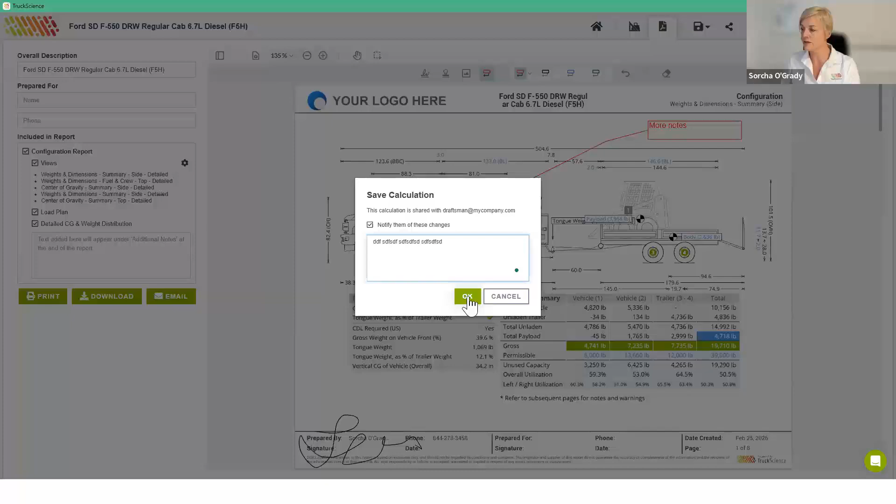Okay, so if I just quickly jump back to my presentation, I realize this has been a very quick tour. If you would like to schedule a demo where we work through a calculation that's relevant to your own organization,

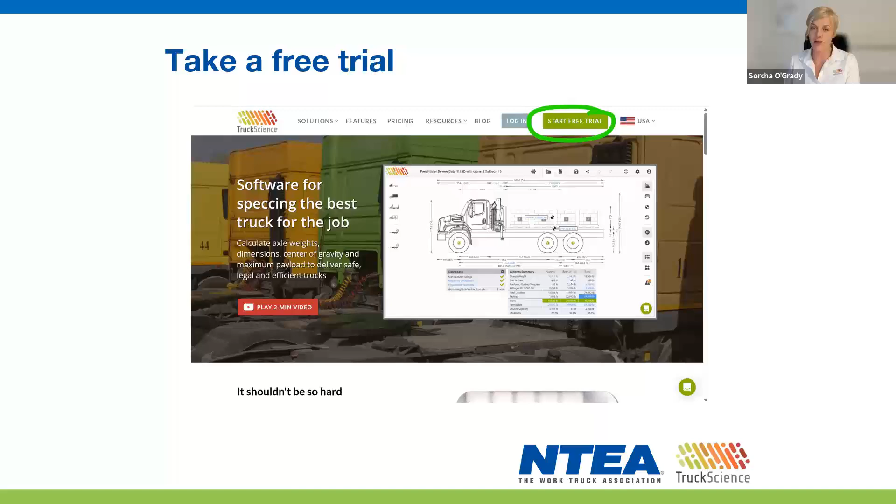Any final questions before we wrap up? No, it looks like all the questions have been answered. Nothing unanswered. Great. Well, thank you, Sorcha and Jens, for the informative webinar today.